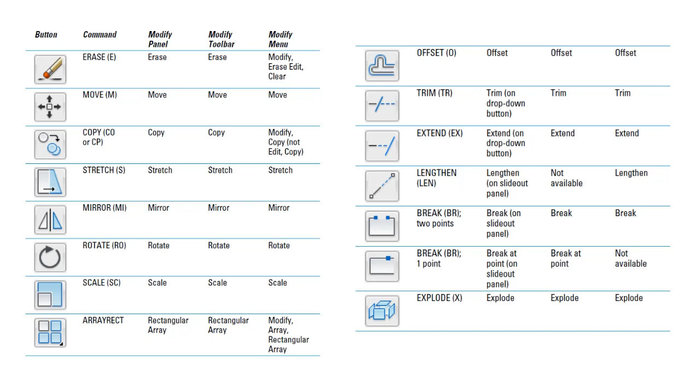AutoCAD's dynamic input system displays command options at the crosshairs. When you see a dynamic input tooltip with a down arrow icon, press the down arrow key to display the command options. You then can use the mouse to select an option. Pressing the up arrow key displays previous input.

As we described, maintaining precision when you draw and edit is crucial to good CAD work. If you used a drawing program and are accustomed to moving, stretching, and otherwise editing objects by eye, you'll need to suppress the habit when you edit in AutoCAD. Nothing ruins a drawing faster than eyeball editing, in which you shove objects around until they look okay, without worrying about precise distances and points.

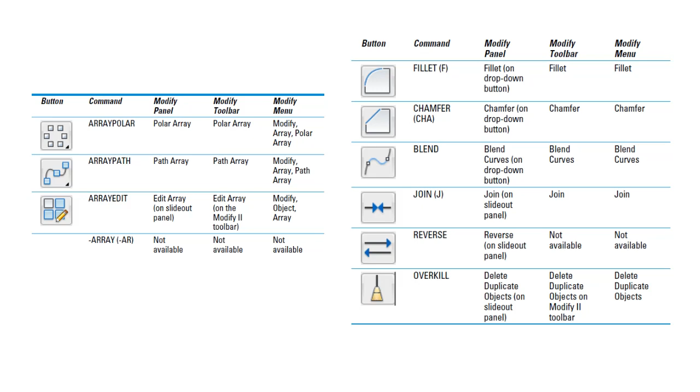Moving, copying, and stretching are for many drafters the three most common editing operations. AutoCAD obliges this need with the Move, Copy, and Stretch commands. The Move, Copy, and Stretch commands all require that you specify how far and in what direction you want objects to be moved, copied, or stretched.

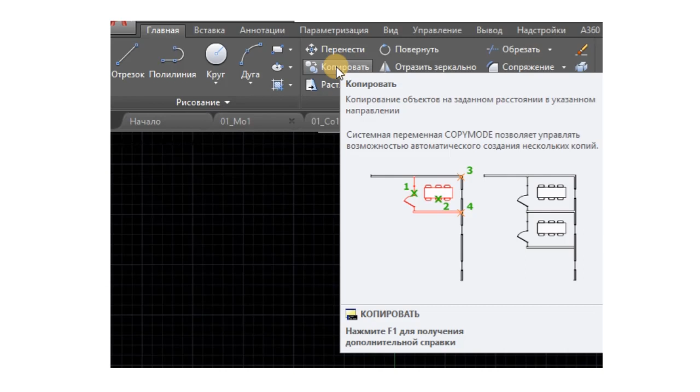After you start the command and select the objects to be edited, AutoCAD prompts you for two pieces of information: Specify base point or displacement, Specify second point or use first point as displacement. In a subtle way, this prompt says that two possible methods exist for you to specify how far and in what direction you want objects copied, moved, or stretched.

The most common way is to pick or type the coordinates of two points that define a displacement vector. AutoCAD calls the first point the base point and the second point the second point. Imagine an arrow pointing from the base point to the second point. That arrow defines how far and in what direction the objects are copied, moved, or stretched.

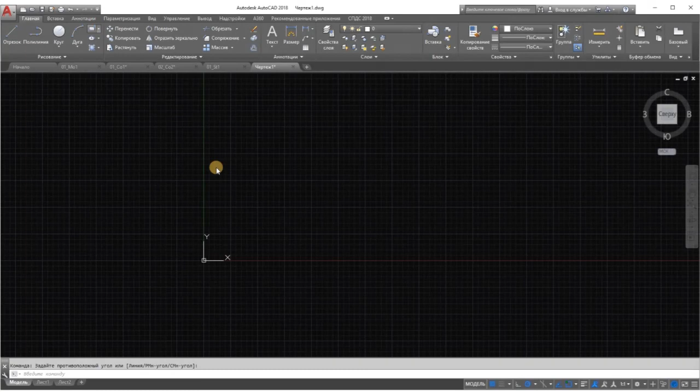The other way is to type an XY pair of numbers that represent a distance rather than a point. The distance is the absolute displacement that you want to copy, move, or stretch the objects. How does AutoCAD know whether your response to the first prompt is a base point or a displacement? It depends on how you respond to the second prompt.

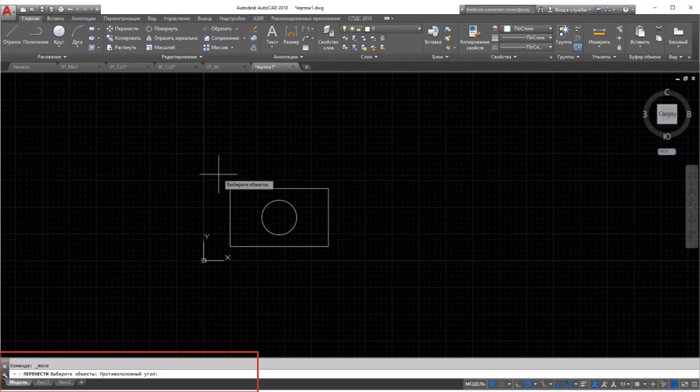It might seem a little confusing at first, but it's actually quite simple. First, you pick a point on screen or enter coordinates at the base point prompt. Next, there are a couple of possibilities. If you then pick or type the coordinates of a point at the second point prompt, AutoCAD says to itself, displacement vector, and moves the objects according to the imaginary arrow pointing from the base point to the second point.

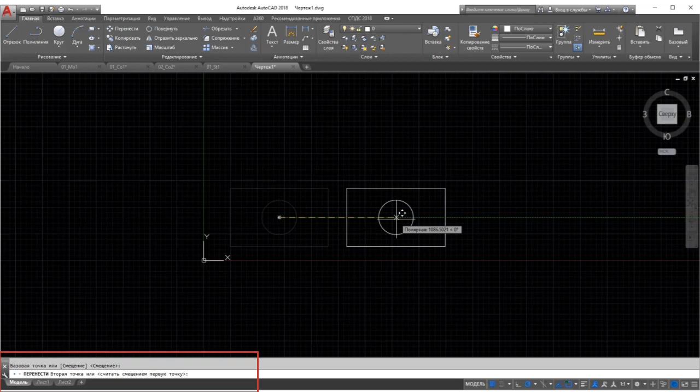And if you press Enter at the second prompt without having typed anything, AutoCAD says displacement distance and uses the XY pair of numbers that you typed at the first prompt as an absolute displacement distance.

Move command. The following steps demonstrate command-first editing with Move, using the base point method of indicating how far and in what direction to move the selected objects. This procedure also gives detailed recommendations on how to use precision techniques when you edit.

Press Escape to make sure that no command is active and no objects are selected. Click the Move button on the Modify panel of the Home tab. The command line displays the Select Objects prompt. Select one or more objects. You can use any of the object selection techniques.

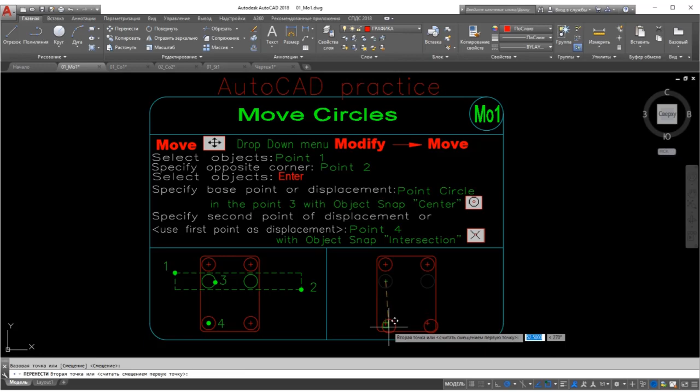Press Enter when you're finished selecting objects. AutoCAD displays the following prompt: specify base point or displacement. Specify a base point by clicking a point or typing coordinates. This point serves as the tail end of your imaginary arrow that indicates how far and in what direction you want the objects moved. After you pick a base point, it's fairly easy to see what's going on because AutoCAD displays a temporary image of the objects that moves around as you move the crosshairs.

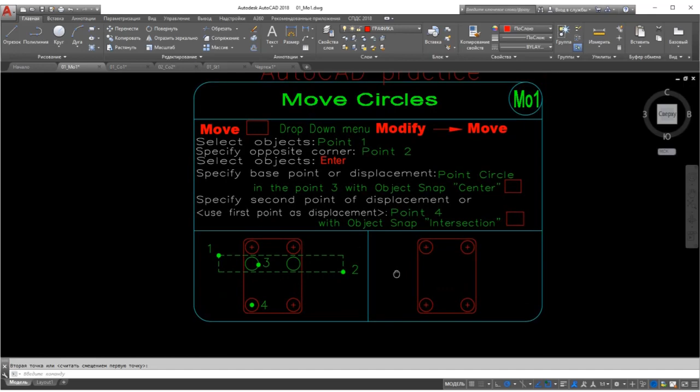Specify a base point somewhere on or near the objects that you're moving. You can use an object snap mode to choose a point exactly on one of the objects. AutoCAD displays the following prompt: specify second point or use first point as displacement. Specify the second point by clicking a point or typing coordinates. The second point serves as the arrow end of your imaginary displacement arrow. After you specify the second point, AutoCAD moves the objects.

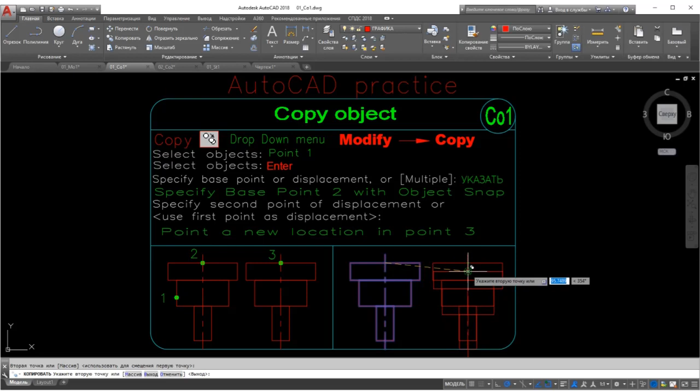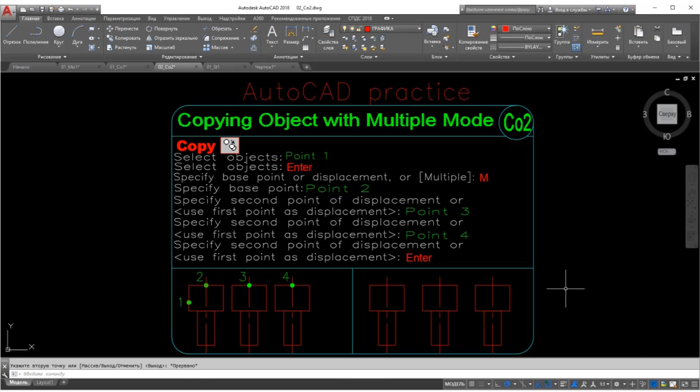Copy. The copy command works almost identically to the move command, except that AutoCAD leaves the selected objects in place and makes new copies of them in the new location. The copy command creates multiple copies by default. If you want only one copy, press Enter after placing it in the drawing. Choosing Mode at the command prompt or the dynamic input option list lets you switch between making a single copy and multiple copies. If you mostly make multiple copies or mostly make single copies, you'll appreciate being able to change the default setting.

Selection boxes left and right. Selecting objects one at a time works great when you want to edit a small number of objects, but many CAD editing tasks involve editing lots of objects. Like most Windows graphics programs, AutoCAD provides a selection window feature for grabbing a bunch of objects in a rectangular area. As you may guess by now, the AutoCAD version of this feature is a bit more powerful than the similar feature in other Windows graphics programs. AutoCAD calls its version implied windowing. Here's how you use it.

Window object selection. If you click a blank area of the drawing that is not an object, you're implying to AutoCAD that you want to specify a selection by dragging a window around the objects. If you move the crosshairs to the right before picking the next corner of the selection area, you're further implying that you want to select all objects that reside completely within the selection area.

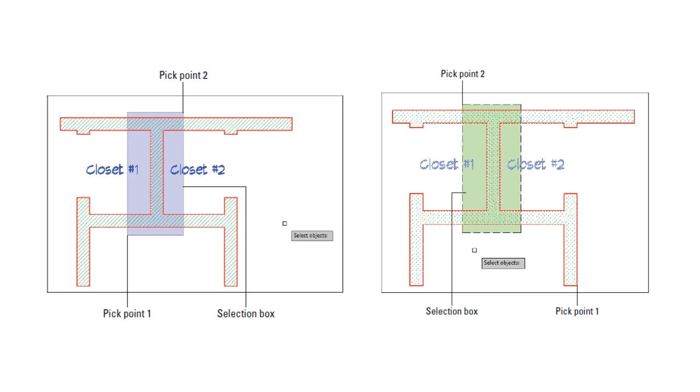Crossing object selection. If you click a blank area of the drawing that is not an object, you're implying to AutoCAD that you want to specify a selection by dragging a window around or through the objects. If you move the crosshairs to the left before picking the next corner of the selection area, you're implying that you want to select all objects that reside completely within or touch or cross the selection area boundary.

Fortunately, AutoCAD gives you visual cues that there is a difference. As you move to the right, the window area appears as a rectangular or polygonal area with a blue fill and solid border. As you move to the left, the crossing area appears as a rectangle or polygon with green fill and a dashed border.

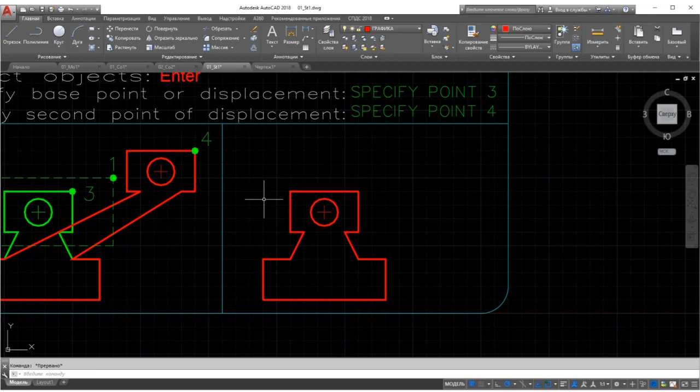If your editing method preference is selection first, AutoCAD gives you the option of dragging a polygonal window or crossing area, or simply dragging a series of lines through the objects you want to select. You simply click a point and drag to the left or right to get rectangular selection boxes as described above, or you can choose the WPolygon, CPolygon, or Fence option by typing the appropriate letter at the command line.

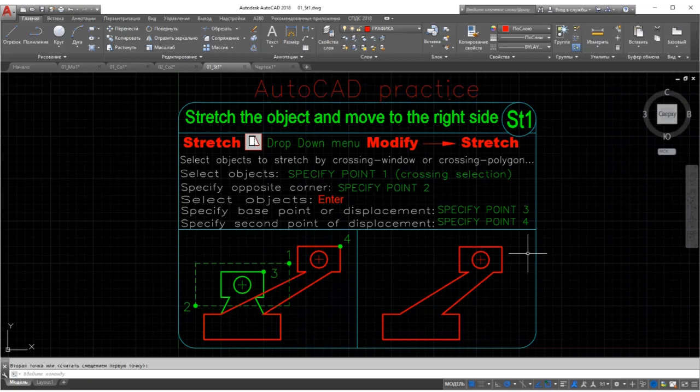Stretch. The stretch command is superficially similar to copy and move. It has the same interesting base point and displacement prompts, and it shifts objects to other locations in the drawing. But it also has one big important difference. It can move one end of one or more objects, leaving the other end or ends where they are, so you can use it to change the length of lines, for example.

Mirror. The mirror command creates a reverse copy of one or more objects. After you select your objects, AutoCAD prompts you to select 2 points that define a line about which the objects will be mirrored. You then have the option to retain or delete the source object. Follow the steps to use the mirror command.

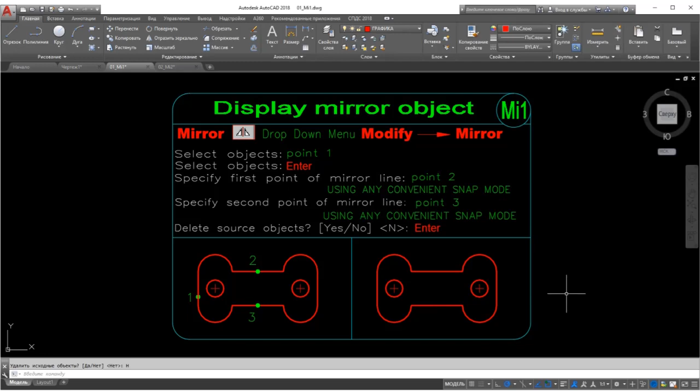First, press Escape to make sure that no command is active and no objects are selected. Second, click the Mirror button on the Home tab's Modify panel. Third, select one or more objects and then press Enter to end object selection. AutoCAD prompts you to define the mirror line by picking points: Specify first point of mirror line.

Fourth, specify the start of the mirror line by clicking a point or typing coordinates. AutoCAD prompts: Specify second point of mirror line. And fifth step, pick a second point. Most of the time you'll want to have polar tracking or ortho mode enabled so you can mirror your object precisely. You can also use object snap on existing objects, including ones being mirrored.

The latter case is used when you want to ensure exact symmetry between the source and the mirrored objects. The mirrored copies appear and AutoCAD prompts: Delete source objects? Yes or No.

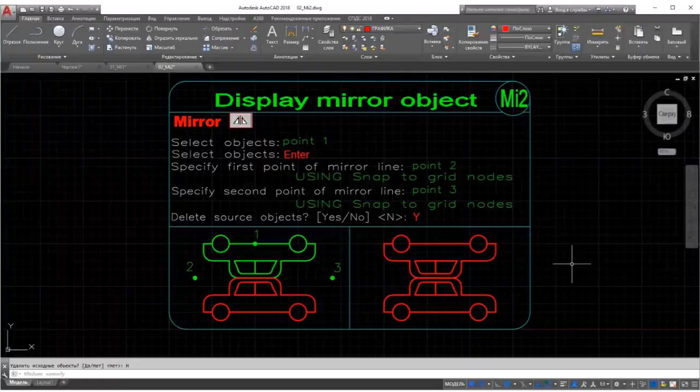Rotate. The rotate command pivots one or more objects around a point that you specify. Follow the steps to use the rotate command. First step, press Escape to make sure that no command is active and no objects are selected. Second step, click the Rotate button on the Home tab's Modify panel. Third, select one or more objects and then press Enter to end object selection. AutoCAD prompts you for the base point for rotating the selected objects.

Specify base point. Fourth step, specify a base point by clicking a point or typing coordinates. The base point becomes the point around which AutoCAD rotates the objects. You also have to specify a rotation angle. Specify rotation angle or [Copy/Reference]. Fifth step, specify a rotation angle by typing an angle measurement and pressing Enter, or just press Enter to accept the default value shown in angle brackets.

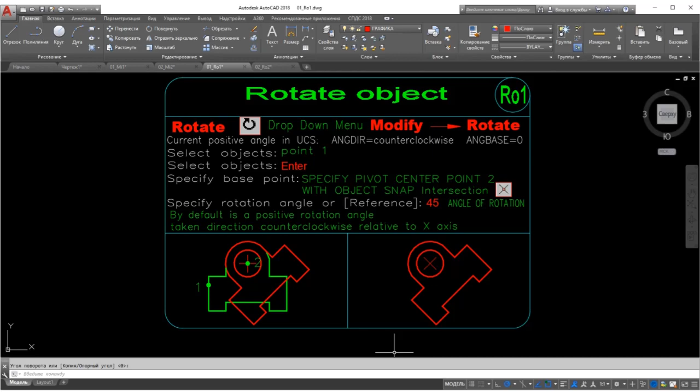Alternatively, you can indicate an angle on the screen by moving the crosshairs until the coordinates section of the status bar indicates the desired angle and then clicking. If you choose this alternative, you will need to use Ortho Mode or Polar Tracking to indicate a precise angle, for example 90 or 45 degrees, or an object snap to rotate an object so it aligns precisely with other objects.

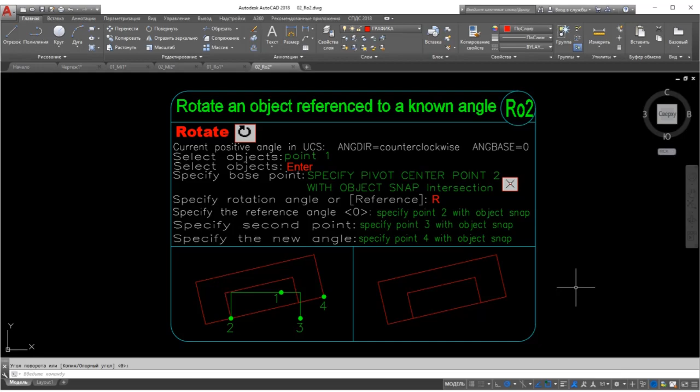After you specify the rotation angle by typing or picking, AutoCAD rotates the objects into their new position. The Rotate command's Copy option makes a rotated copy while leaving the source objects in place.

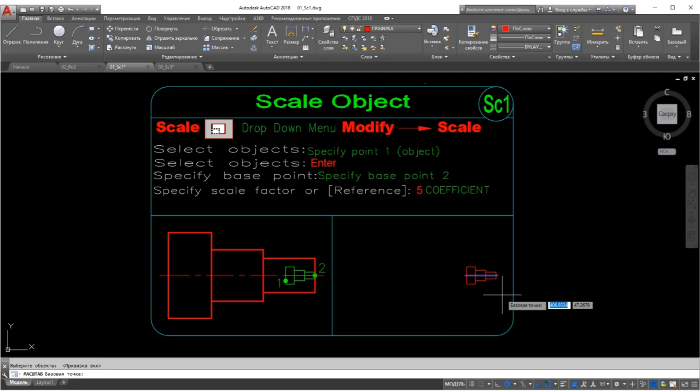Scale. Scale uniformly scales, enlarges or reduces, one or more objects up or down by a factor that you specify. Here is how it works. First step, press Escape to make sure that no command is active and no objects are selected. Second step, click the Scale button on the Home tab's Modify panel. Third, select one or more objects and then press Enter to end object selection. AutoCAD prompts you for the base point around which it will scale all the selected objects.

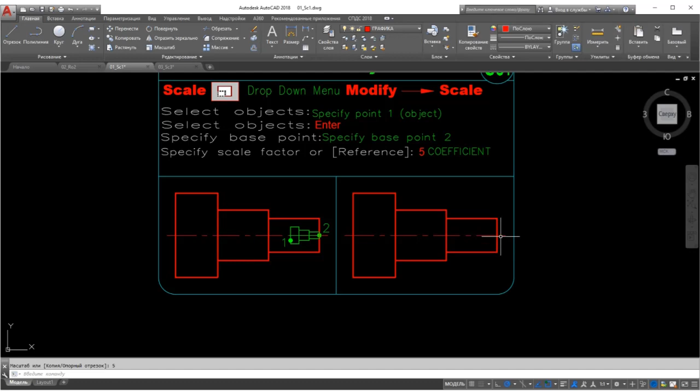Specify base point. Fourth step, specify a base point by clicking a point or typing coordinates. The base point becomes the point around which the objects are scaled. AutoCAD prompts you for the scale factor. Specify scale factor or [Copy/Reference].

Don't assume that AutoCAD will scale the objects but leave them more or less where they are in the drawing. AutoCAD scales the distance between objects as well as the objects themselves. For example, if you select a circle to scale, pick a point outside the circle as the base point and then specify a scale factor of 2, AutoCAD not only makes the circle twice as big, but also moves the circle twice as far away from the base point that you specified.

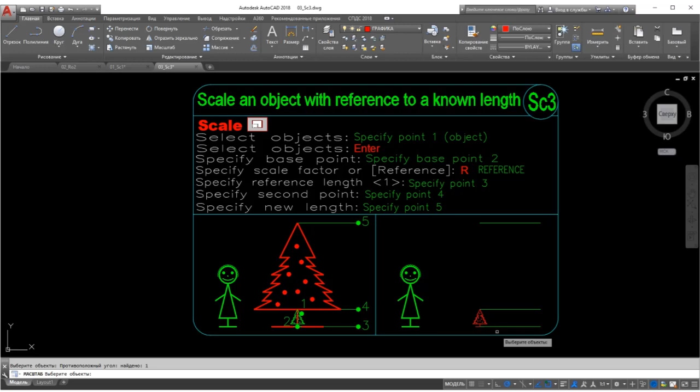If you want to make a circle bigger but leave it where it's currently located, make sure that you use the Center object snap to select its center point as the base point for the scale operation. Fifth step, type a scale factor and press Enter. AutoCAD scales the objects by the factor that you type, using the base point that you specified. Numbers greater than 1 increase the object sizes. Numbers smaller than 1 but greater than 0 decrease the object sizes. Negative scale factors are invalid.

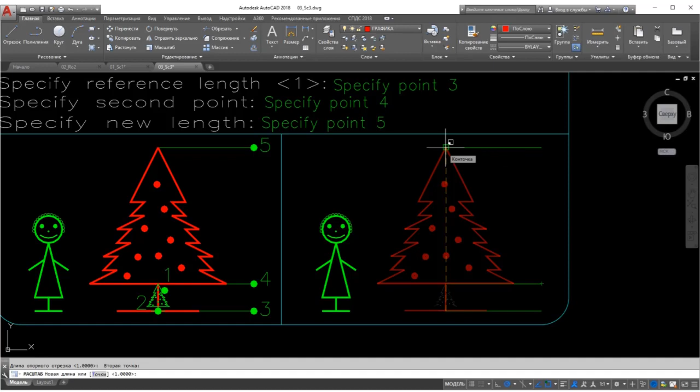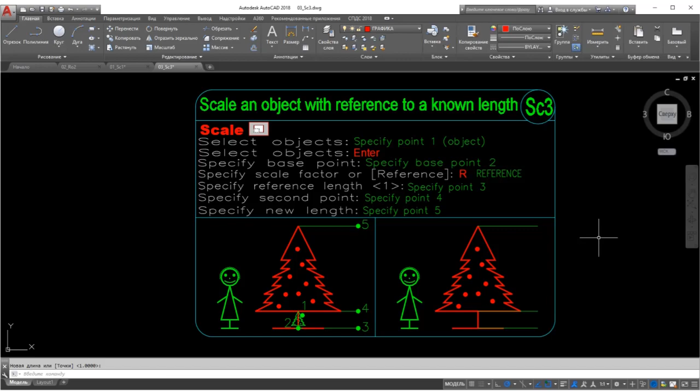Just like the Rotate command, Scale also has a copy option with which you can make enlarged or reduced duplicates of selected objects without altering the source objects. And both Scale and Rotate remember the last scale factor or rotation angle entered throughout the drawing session.

Array. The array command is like a supercharged copy. You use it to create a rectangular grid of objects at regular x and y spacing or a radial arrangement of objects around a center point at a regular angular spacing. For example, you can use rectangular arrays to populate an auditorium with chairs or a polar array to populate a

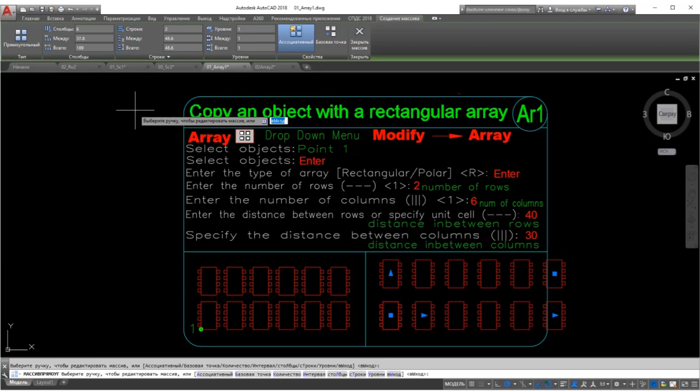bicycle wheel with spokes. The kind of array we describe in this chapter is the old style but still very useful non-associative array. Non-associative arrays are simply copies of the source object. They dwell on the same layers as their source, and they can be edited individually even in older releases of AutoCAD. The following steps describe how to create a rectangular array, which you'll probably do more often than creating a polar array.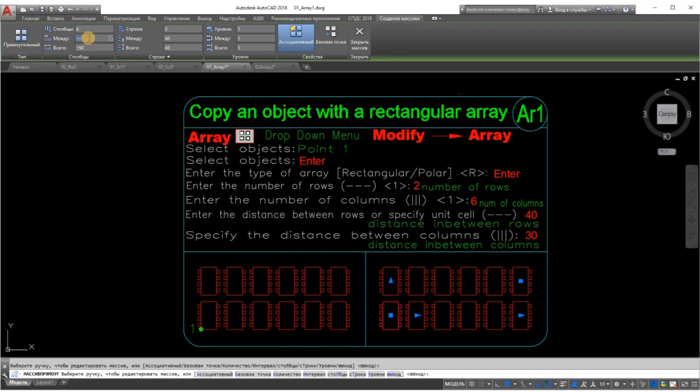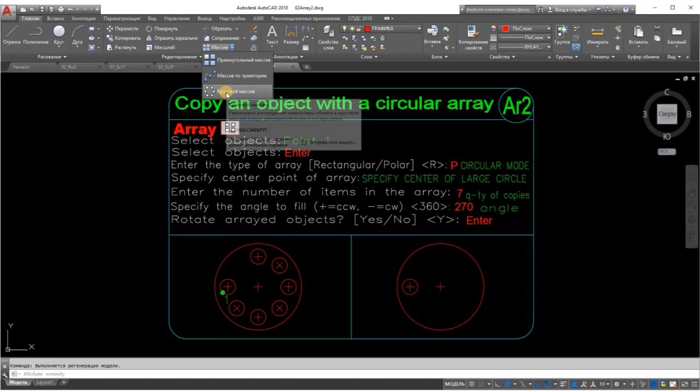First, press Escape to make sure that no command is active and no objects are selected. Second, type -array, don't forget the hyphen, and press Enter. Typing a hyphen in front of an AutoCAD command normally tells the program to run as a command line rather than a dialog box. Starting with AutoCAD 2012, typing array runs the associative array tool, whereas typing -array runs the non-associative version. First, AutoCAD prompts you to select the objects you want to array.

Third step, select one or more objects, then press Enter. Next, AutoCAD prompts you to choose the type of array you want. Enter the type of array, rectangular or polar. Fourth step, type R and press Enter to create a rectangular array. Next, you specify the number of rows and columns you want and the distance between each of them. AutoCAD prompts, enter the number of rows.

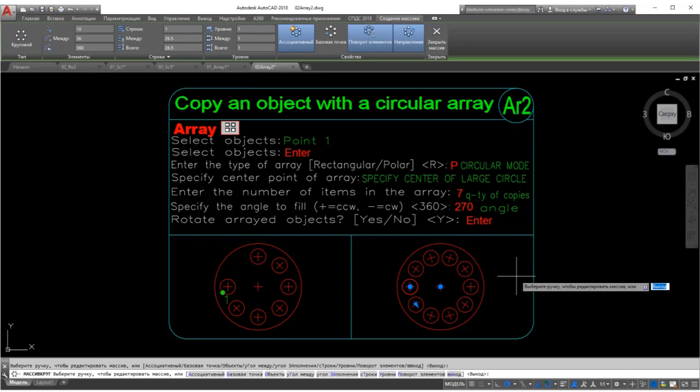Fifth step, enter a value and press Enter. AutoCAD next asks the number of columns, the distance between rows, and finally the distance between columns. The rows and columns numbers include the row and column of the original objects themselves. In other words, entries of one don't create any new objects in that direction. Sixth, enter values for the number of columns and the distance between adjacent rows and columns and then press Enter. AutoCAD creates regularly spaced copies of the selected objects in neat rows and columns.

Offset. You use offset to create parallel or concentric copies of lines, polylines, circles, arcs, or splines. Follow the steps to use offset. Click the Offset button on the Home tab's Modify panel. AutoCAD displays the current command setting and prompts you for the offset distance, the distance from the original object to the copy you're creating. Current setting, and specify offset distance. Second step, type an offset distance and press Enter.

Alternatively, you can indicate an offset distance by picking 2 points on the screen. If you choose this method, you should normally use object snaps to specify a precise distance from one existing object to another. AutoCAD prompts you to select the object from which you want to create an offset copy. Select object to offset or. Third step. Select a single object such as a line, a polyline, or an arc. Note that you can select only one object at a time with the Offset command. AutoCAD asks where you want the offset object. Specify point on side to offset or.

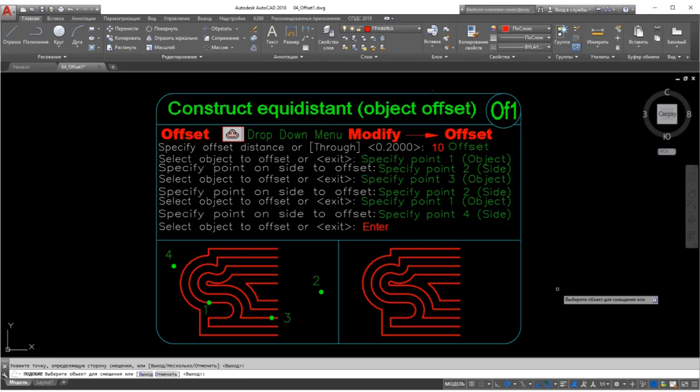Fourth step. Point to one side or the other of the object and then click. It doesn't matter how far away from the object the crosshairs are when you click, you're simply indicating a direction. AutoCAD repeats the select object prompt in case you want to offset other objects by the same distance. Select object to offset or. Fifth step. Go back to step 3 if you want to offset another object or press Enter if you are finished offsetting objects for now.

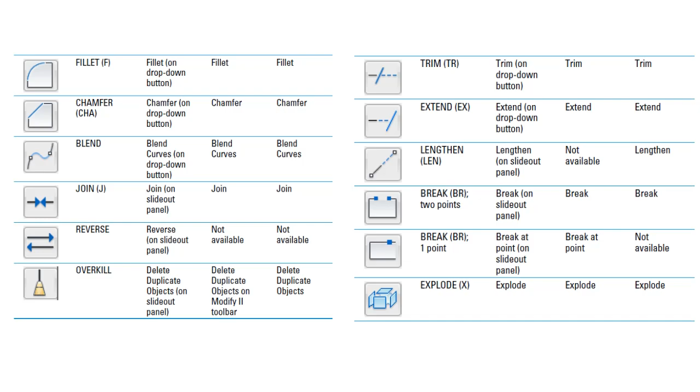The commands in the next section, trim, extend, break, fillet, chamfer, blend and join, are useful for shortening and lengthening objects, for breaking them in two, and for putting them back together again. Trim and extend. Trim and extend are the twin commands for making lines, polylines, and arcs shorter and longer. The two commands and their prompts are almost identical, so the following steps cover both. We show the prompts for the trim command. The extend prompts are similar.

Step 1. Click the Trim or Extend button on the Home tab's Modify panel. AutoCAD prompts you to select cutting edges that will do the trimming, or if you choose the Extend command, boundary edges to extend to.

Second step. Press Enter to accept the default option to select all drawing objects, or select individual objects by picking them. Press Enter to end object selection. The objects you select in this step become the cutting edge of the Trim command or the boundary to which objects will be extended by the Extend command.

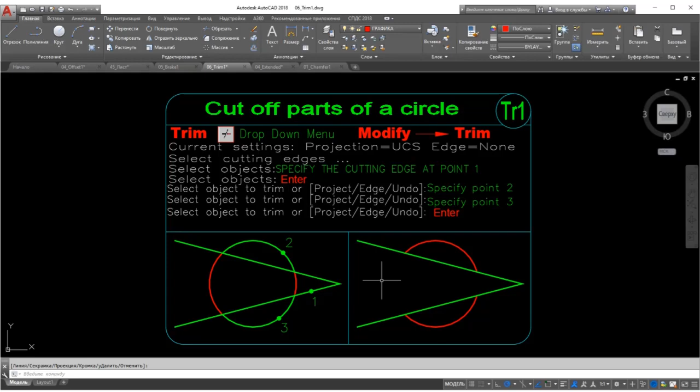AutoCAD prompts you to select objects that you want to trim or extend. Extend doesn't have the Erase option. Step number 3. Select a single object to trim or extend. Choose the portion of the object that you want AutoCAD to trim away or the end of the object that's closer to the extend-to boundary.

AutoCAD trims or extends the objects to one of the objects that you selected in step 2. If AutoCAD can't trim or extend the objects, for example, if the trimming objects and the objects to be trimmed are parallel, the command line displays an error message such as "Object does not intersect an edge."

You can select multiple objects to trim and extend by typing F and pressing Enter to use the Fence object selection mode, or by entering C to use crossing selection. Even better, you can use implied windowing and drag a selection box to select multiple objects. Step 4. Choose additional objects or press Enter when you are finished trimming or extending.

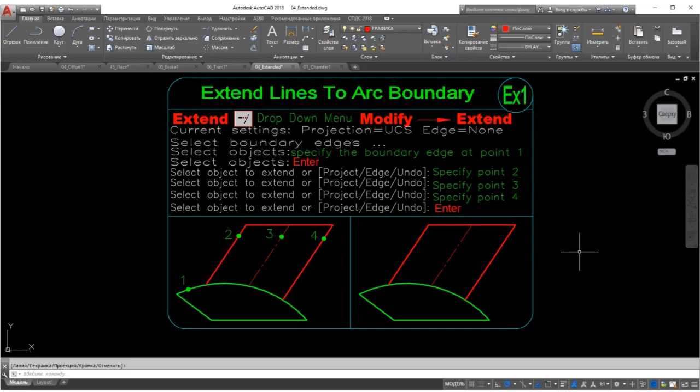Fillet and chamfer. Whereas trim, extend and break alter one object at a time, the fillet and chamfer commands modify a pair of objects. Fillet and chamfer show a preview of the result of the operation as soon as you select the objects to modify. If the fillet radius or the chamfer distances don't look right in the preview, you can change their values before completing the command. The following steps describe how to use the fillet command.

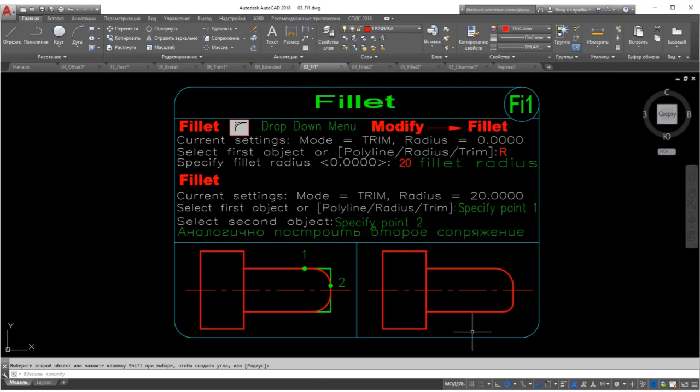The chamfer command works similarly except that instead of specifying a fillet radius, you specify either two chamfer distances or a chamfer length and angle. Step 1. Click the Fillet button on the Home tab's Modify panel. Fillet and chamfer share a flyout button; if you see a straight line corner instead of a rounded one, click the flyout arrow to select fillet.

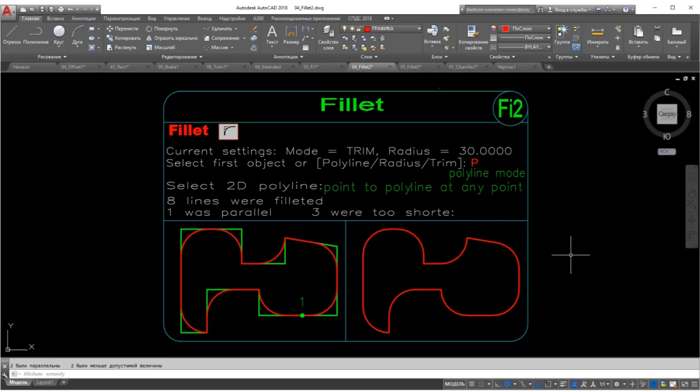AutoCAD displays the current fillet settings and prompts you to select the first object for filleting or specify one of the options: Current settings: Mode = TRIM, Radius. Select first object or Undo, Polyline, Radius, Trim, Multiple. Step 2. Type R and press Enter to set the fillet radius. AutoCAD prompts you to specify the fillet radius that it uses for future fillet operations.

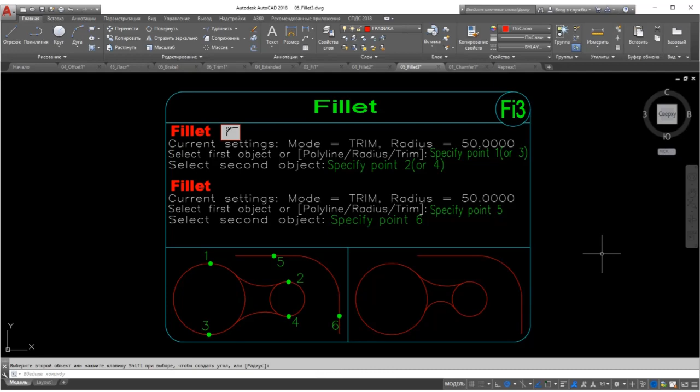Specify fillet radius. Step 3. Type a fillet radius and press Enter. The number you type will be the radius of the arc that joins the two lines. AutoCAD then asks you to select the first object. Step 4. Select the first line of the pair that you want to fillet. AutoCAD prompts you to select the second object for filleting. Step 5. Select the second line of the pair that you want to fillet. AutoCAD fillets the two objects, drawing an arc of the radius that you specified in Step 3.

You can fillet two lines and specify a radius of 0 to make them meet at a point. If you have lots of lines to fillet, whether with a 0 or the same non-zero radius, use the fillet command's Multiple option to speed the process. If you start fillet and select two parallel lines, you get a nice 180-degree arc joining them.

You can add fillets to arcs and splines, and you can fillet all the vertices of a polyline at one time by choosing the Polyline option before you select the objects. Holding down the Shift key before picking the second line automatically gives you a clean intersection, the same as if you would set the fillet radius to 0. The chamfer command has the same Shift selection option.

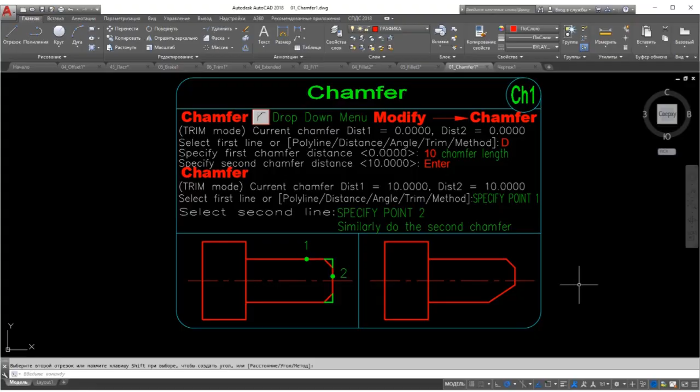Here's the end of our seminar. Now you know how you can modify objects through edit tools with all this manipulation we have learned. And in the next seminar we'll study how to work with text and dimension line styles in AutoCAD.